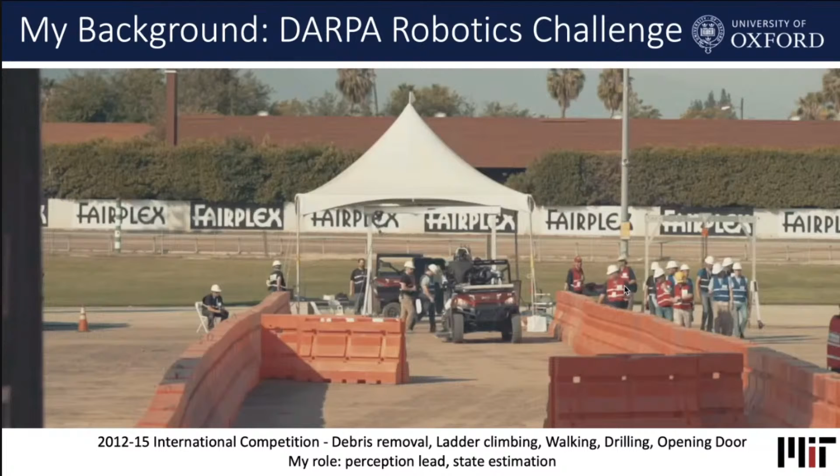Through that, I worked with Cesar Cadena, who was one of Jose's students at that time. But I took a sort of slightly left-field direction and got involved in a large-scale robotics competition called the DARPA Robotics Challenge, which you might be familiar with.

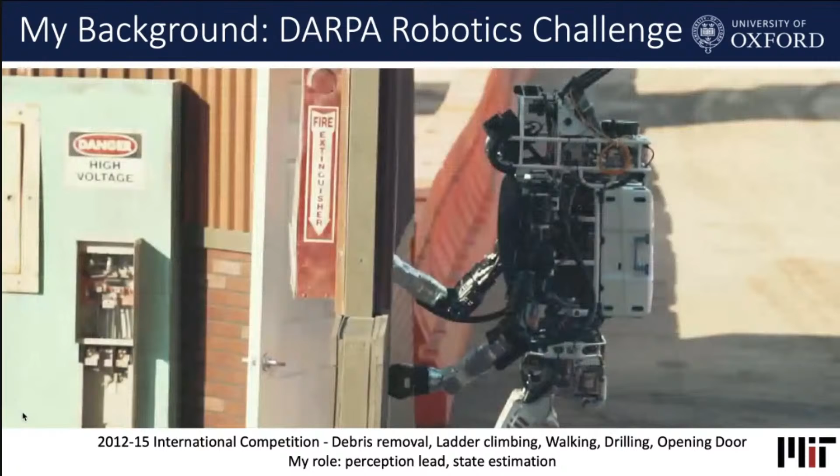It ran until about 5 years ago, and it involved a slightly clunky older version of the Atlas robot from Boston Dynamics, doing a variety of manipulation and locomotion tasks. I had the role of leading on the perception side of things, and in large part that involved focusing on state estimation and local situational awareness and mapping for the robot to do these tasks.

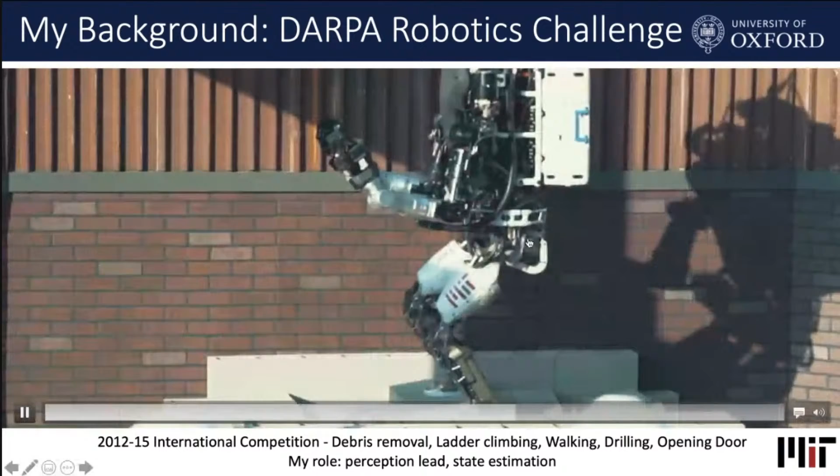Quite a number of our team have now gone on to work on the actual Atlas team at Boston Dynamics. One of the projects I was involved in at that time that I was most interested in was trying to couple perception into the locomotion system.

Here you can see a system in which we have an onboard state estimator, which I'll talk about in more detail later regarding legged robot state estimation. Effectively, we have a motion estimator that uses the robot's legs, an IMU or fiber optic gyroscope in the robot's pelvis, and combines all of those measurements together to get the position of where the robot is that you see in the field of view.

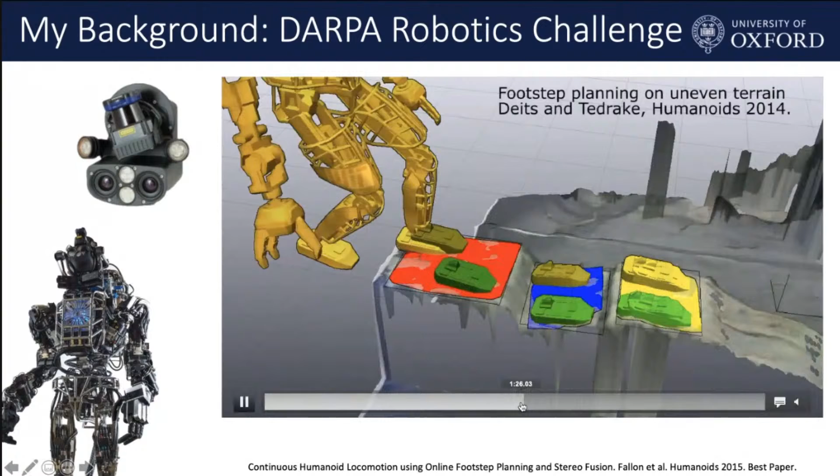On top of that, for this particular work, we were fusing together the stereo images from the robot's stereo camera, which you can see on the left-hand side. It was actually a passive stereo camera mounted in the robot's head, which was quite a significant challenge. In doing so, we were able to build reconstructions in front of the robot's feet.

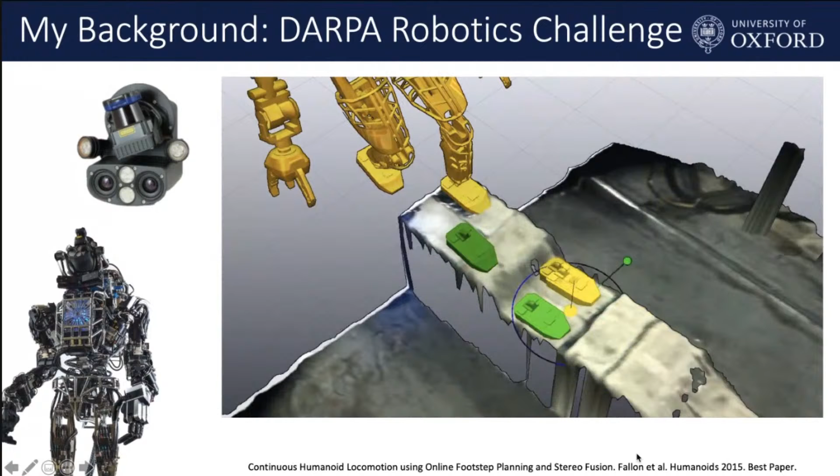This enabled receding horizon footstep planning. This was kind of one of the only major perception-in-the-loop locomotion systems developed in the competition. As you can see here, at interactive rates it was enabling the robot to replan and then execute the motion indicated in the video.

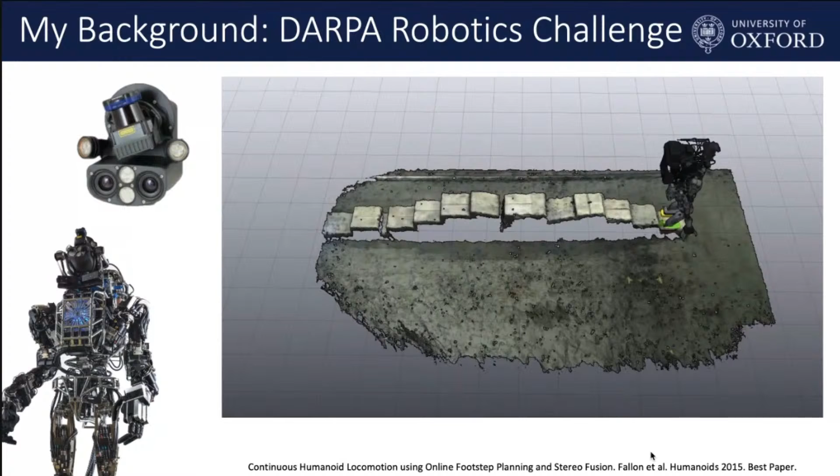So when I finished working on that as a research scientist or postdoc, I moved to Oxford to set up my own independent research group, and we focused on quadrupeds. 4 legs is better than 2, a phrase from the book Animal Farm, but effectively quadruped platforms are much more amenable to field usage and for things like exploration or inspection tasks.

You're probably very familiar with quadruped platforms like Spot and the ANYmal in the middle that we work with. We're working on research tasks to do with that, building local situational awareness using visual inertial navigation and multi-sensor fusion, and also doing work on dynamic locomotion and motion planning. I share this group with Ioannis Havoutis, illustrated here on the right-hand side in orange.

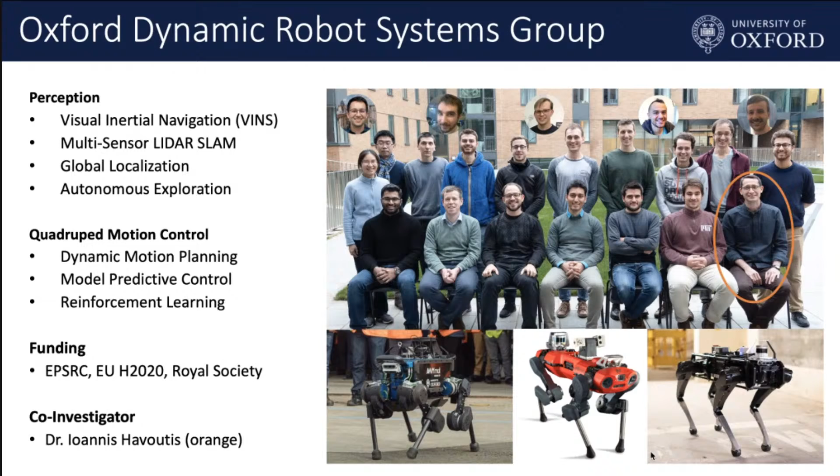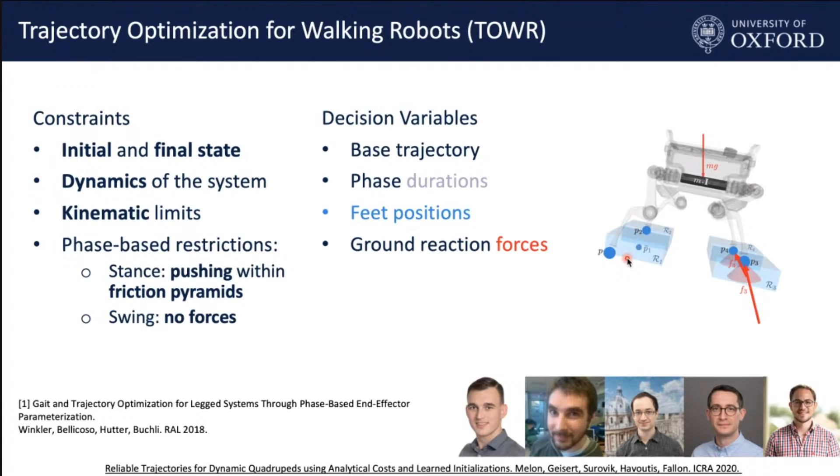Also, other constraints that restrict the motion are the dynamics of the system - the mass distribution of each of the links in the legs as well as the torso, and also the kinematic limits, the capacity of the robot's feet to move from one place to another or to hold up certain configurations. In this particular work, that's simplified to this blue box. This work on trajectory optimization formulates these constraints as an optimization problem, illustrated here on the right-hand side.

For example, for the left foot moving, it can apply a certain force profile over time - this is in the order of a second. You can see the force in the z-axis, the downward force, which is either zero over the course of this part, or then rises up above that, limited by effectively a spline constraint. Initially there's zero force because the foot is in air, then forces are high once it comes into contact, until again it goes out of contact, while the foot position conversely can move when there's no force and must stay stationary when there is force.

Effectively this formulates a constrained optimization problem, which we then solve with nonlinear optimizers. We use a package called IPOpt.

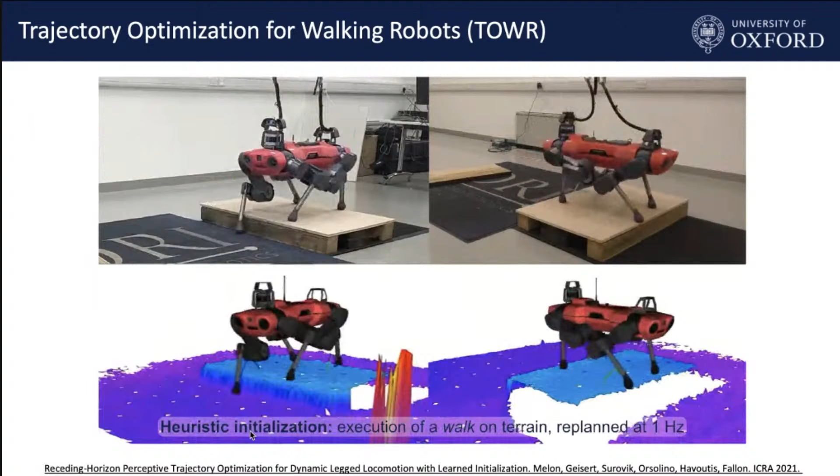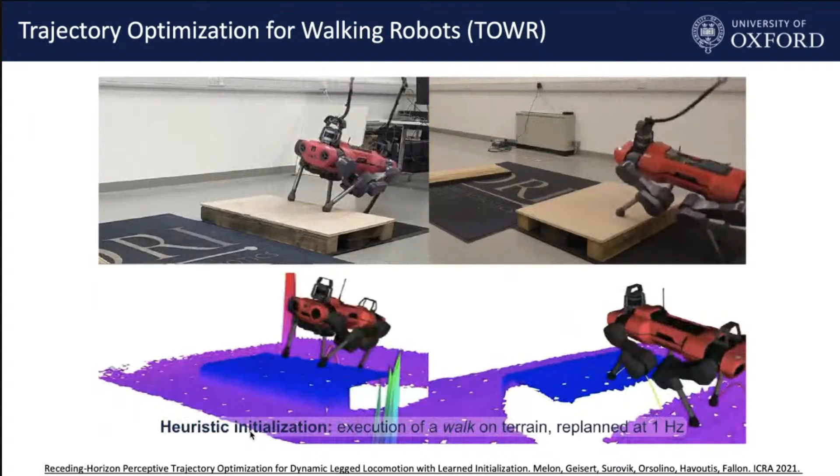So this is to show some of the work that we've done on computing dynamic trajectories given these set of constraints. It's work that we've just ported over to this newer version of the ANYmal robot. The black robot is an initial prototype by a company called ANYbotics from Zurich, and this platform here is a newer version called ANYmal C version C. They're effectively the second competitor to Boston Dynamics in the development of legged robots.

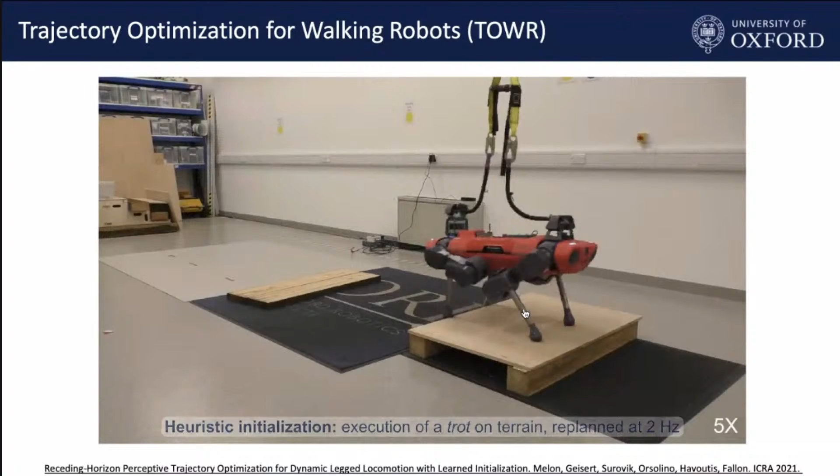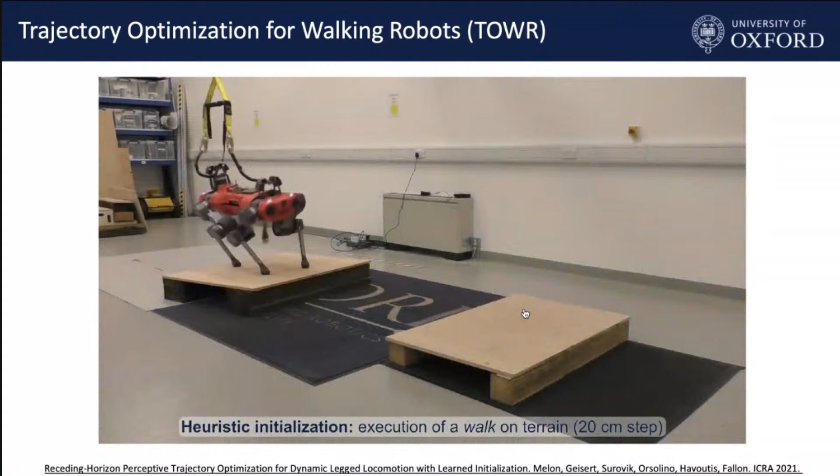The key advantage for us using this platform is that we have access to the software API to actually command the robot at 200 or 400 hertz, while with Boston Dynamics, what's available to both industrial users and the academic community is just high-level access to tell the robot to go at a certain velocity of its torso. Here we're computing these trajectories for the robot to walk over pretty significant obstacles for its height, and then executing them while replanning based off of the perception.

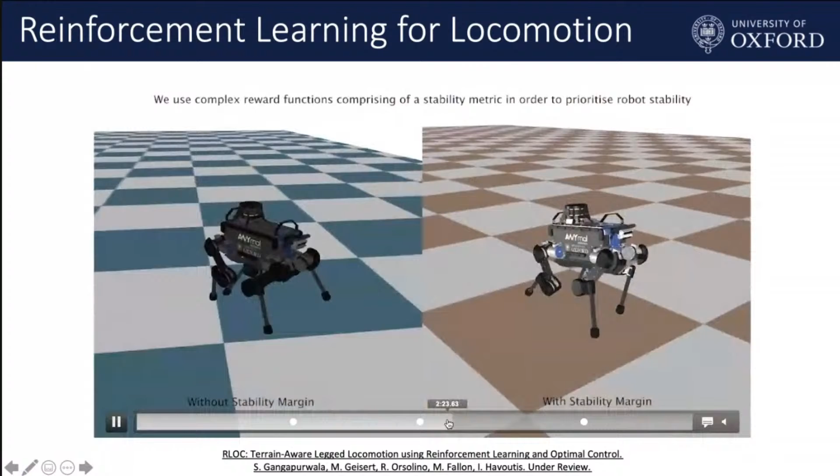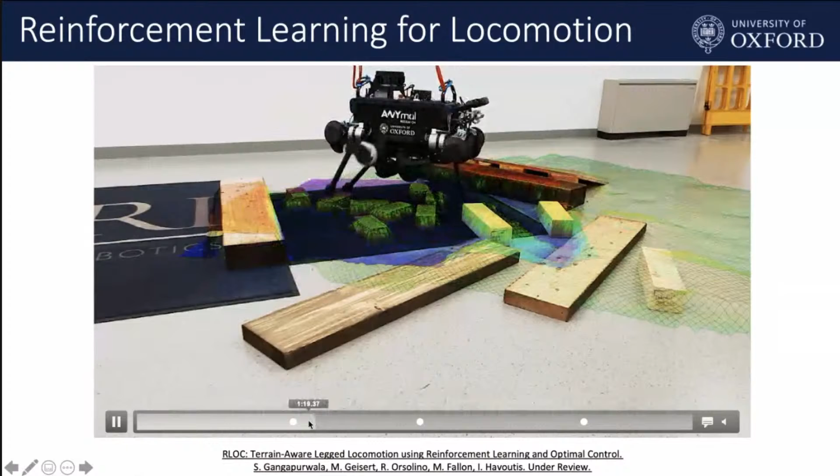This bit is just showing that if you provide suitable reward functions, then you can generate things that are more like walking gaits. After training, what you see here is that with an accurate model of the robot and of the terrain underneath it, this is a common representation we'll keep coming back to: elevation reconstruction underneath the robot, based off of depth cameras like the Intel RealSense pointing at the robot's feet. Effectively, the reinforcement learning algorithm gives us a mapping between the observed terrain and footstep parameters to optimize a locomotion walking controller that closes the loop for locomotion.

Moving on to the core of my talk, I'm going to talk about multi-sensor odometry and mapping, and I'll frame it by the DARPA Robotics Challenge, DARPA Subterranean Challenge. It's a multi-year competition in which teams of robots—you can choose as many robots as you'd like to deploy, but you've only one hour in which to deploy them—explore unknown environments.

On the right-hand side, you can see a facility in Washington State in the US, where in February of last year, just before the first COVID lockdowns, the teams gathered to explore a few of the floors underneath one of the cooling towers, and you can see the characteristic shape of the cooling towers here. The robots were given one hour to explore the facility.

It started at a gate like this, and you can see these tags that were used to infer the starting point using cameras. Thereafter the goal was to build very large-scale, accurate maps of the environment, and within that environment to locate objects of interest. So it was a giant treasure hunt.

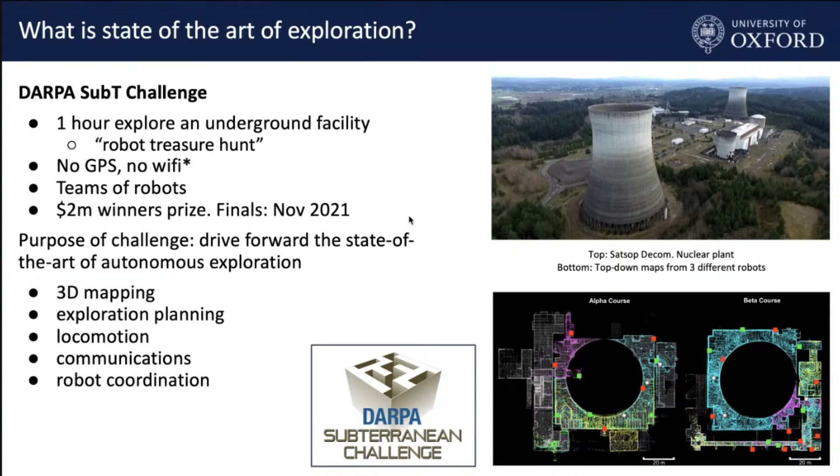The objects of interest were backpacks and mannequins that could be detected using autonomous computer vision, or actually reported back to an operator. There was actually one operator—all of the other members of the team could only communicate orally with the operator, who would then deploy each of the robots down the starting gate as illustrated in this video. Thereafter the robot either could communicate through its own onboard wireless network back to the operator, or would have to operate entirely autonomously.

The idea of the competition was to encourage the development of highly autonomous systems, but not actually requiring absolute autonomy, which is typically a very complex design requirement when operating in very unknown environments like this. Here you can actually see the robot passing one of the other robots, the drone that our team had deployed earlier in the competition, as it makes its way down the tunnel.

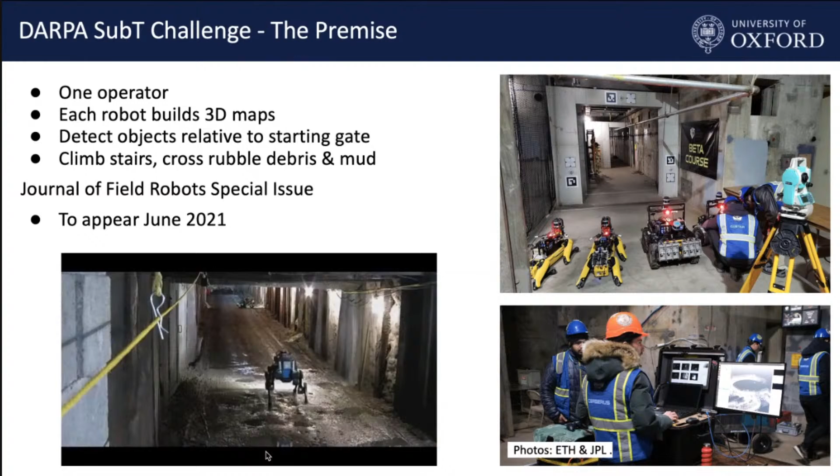A little bit further down the tunnel, you can start to see some of the challenges. You can see muddy ground with puddles of water, which are particularly challenging because if you're using a LiDAR or a depth camera to scan the ground, these show up as blank holes. And as it goes up the corridor, you can see one of the other robots that had fallen in that stage of the competition.

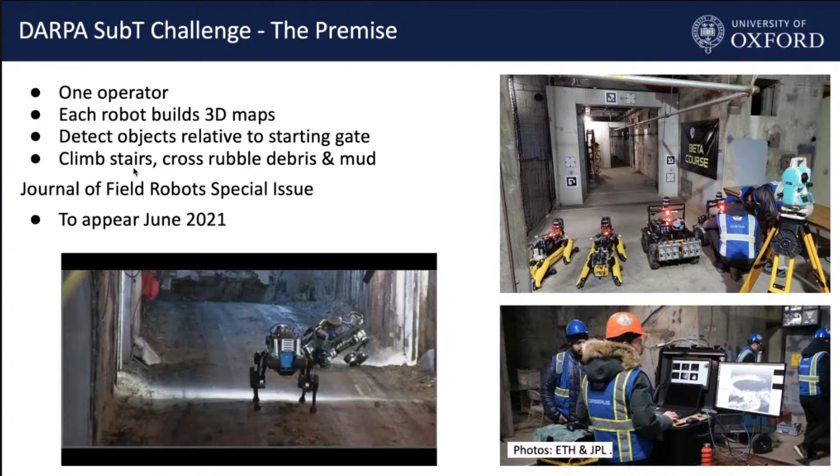You should keep an eye out for a special issue in the new rebooted Journal of Field Robotics that should appear in the summer, describing the progress of all the teams competing in this competition.

This is the team that we're involved in. I came in as a junior member after the competition had started. It's led by Professor Kostas Alexis, who just left the University of Nevada to go to a university in Trondheim in Norway. There's also a heavy contribution from ETH Zurich, who we collaborate with on the quadruped robots, as well as the ASL team from Roland Siegwart. So that's Marco Hutter and Roland Siegwart. Our focus is on aerial and legged systems.

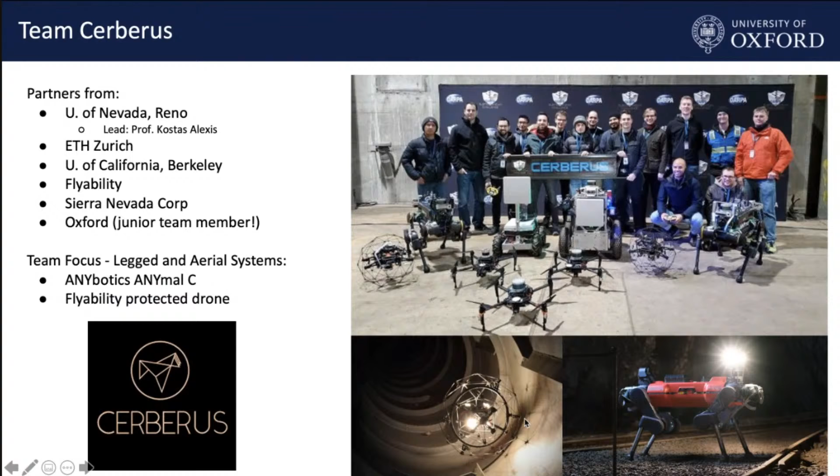I'm going to focus on the legged system. I think this competition has demonstrated the growing maturity of both autonomous mobile robots and legged systems. The last phase of the competition was actually won by a team from JPL called CoStar, deploying a couple of Spot robots that were able to autonomously climb up and down staircases during the competition. But it's not the only type of platform.

On the bottom right here, you can see a platform from the team from CMU called Explorer. But the key comparable characteristic, as I mentioned previously, is the need for omnidirectional sensing in all directions - depth cameras and LiDAR pointing in all directions, both around the robot's legs and underneath its belly, as you can see here, but also out in front to be able to perceive where free space is.

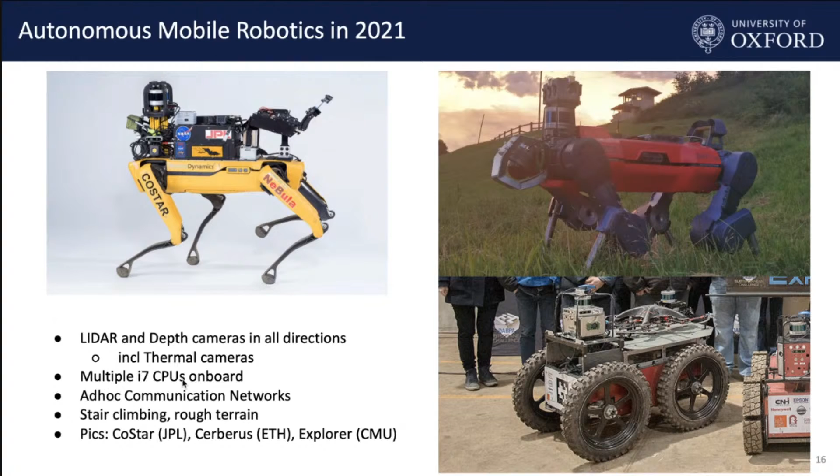That's made possible by the miniaturization of multiple i7 CPUs, and also one of the technologies I won't talk about that is a significant part of this competition is the ability to deploy communications within the facility. If you take one of these mobile robots exploring an unknown facility, the first time it turns around a wall made of concrete, your communications network would fail. So a significant engineering challenge has been to develop deployable wireless networks that, as you can see here, are dropped from the robot's belly, and that can then be used to create a kind of mesh network that allows the operator to communicate deep into the facility.

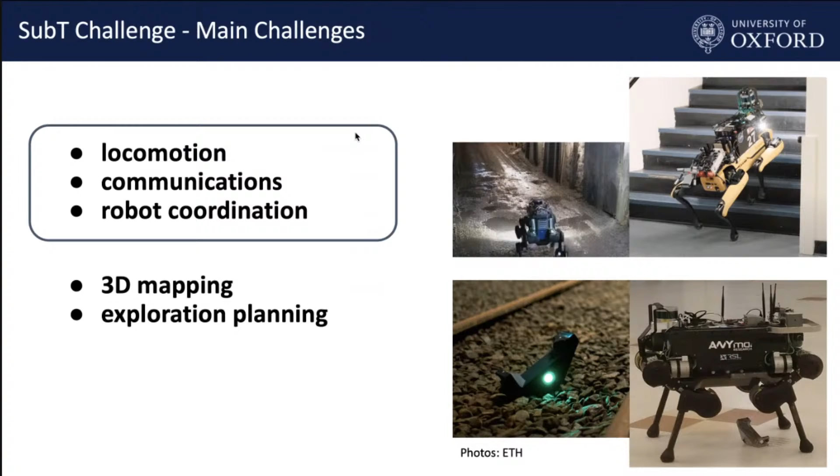Another aspect is mobility, and as I mentioned, I won't focus so much upon that, but the Spot robots are pretty impressive in this regard. What I will focus on for the rest of the talk is the 3D mapping systems that we've been developing.

Given the multitude of different environments we're expected to operate in, including the addition of artificial smoke, which can have a really negative effect on LiDAR, these are four different types of odometry that we'd like to take advantage of in our platform. So you can see forward-facing cameras, the LiDAR, the legged contribution, and thermal odometry, which I won't talk about very much today.

I'll start with leg odometry, with a background in the DARPA humanoid challenge that I mentioned previously. I started working on quadruped systems, and what you can see here is a quadruped from a group in the Italian Institute of Technology in Genoa, which develops this quadruped robot called HyQ. One of the challenges you can see from it locomoting is that when its feet press against the ground, it causes quite an impact, which can have a significant effect on leg odometry.

Leg odometry is a process by which, when a robot makes a firm foothold in the ground, we can use the knowledge that a particular foot is being classified as being in contact to create a constraint and infer the forward velocity. Effectively, you have a lever arm where you assume a particular foot is in contact with the ground, and as the rest of the robot moves forward, you can infer its relative motion from each one of those contact points. However, there's quite a significant filtering challenge in doing so.

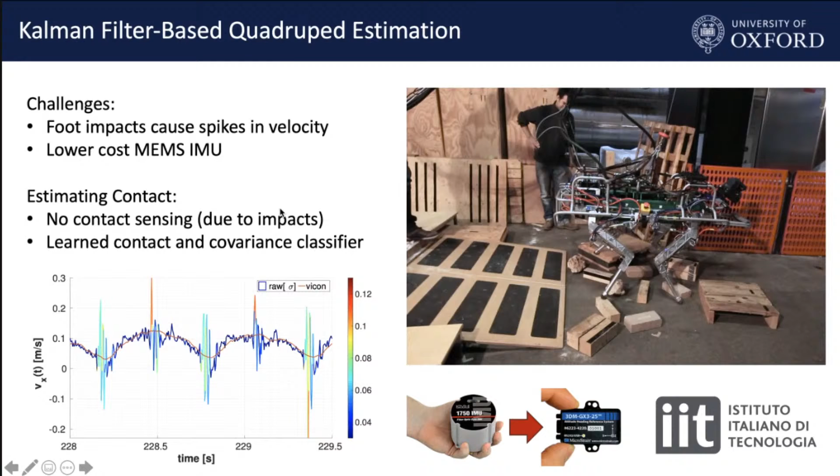So you can see these very spurious velocity spikes, which makes incorporation of this within a control system quite challenging.

But over the course of that project, we developed an extended Kalman filter based quadruped state estimator. So an extended Kalman filter is incrementally carrying out IMU based propagation.

So either with this fiber optic gyro from a company called KVH on the bottom left. That's effectively measuring the movement of light around a sphere inside of the fiber optic gyro, and being able to use that to infer very accurately rotation.

Or more commonly these days, we focus on MEMS grade or lower cost electronic based IMU sensors. Within an EKF approach, we're predicting the state and then correcting it with the leg kinematics.

Onto that work, we incorporated both vision and LiDAR. But what we wanted to do in the work that we've done in the last 3 to 4 years is to instead look at fusing the leg kinematics, which is reliable. It gives you a low drift rate, and it's very, very low latency, because effectively at 400 hertz you get each update of your IMU sensor and your robot's leg kinematics, and to incorporate that with vision going forward.

So visual inertial odometry, as you would have heard from talks from Davide Scaramuzza and Stefan Leutenegger during this series, is an increasingly mature field in which measurements from an IMU and either a mono or a stereoscopic camera are fused together to constrain the motion, usually on a drone platform.

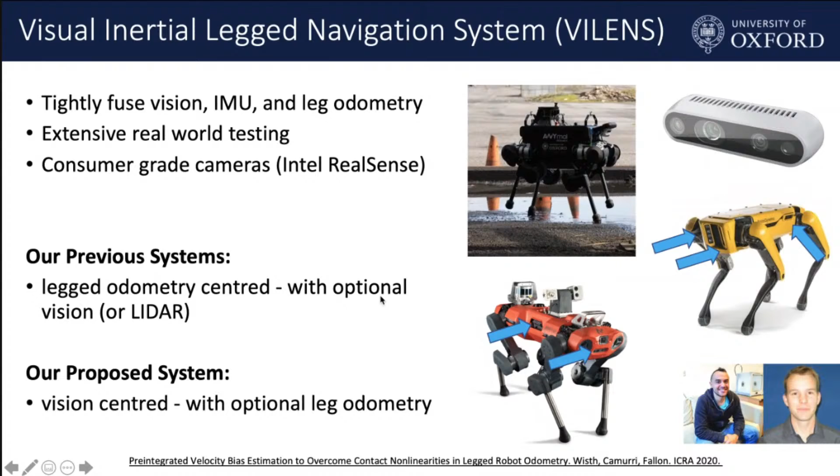And as I mentioned, one of the key motivations is that on these robots going forward, we're likely to see multiple depth cameras, such as the RealSense, which also has an IMU. This is the Intel RealSense D435i, and it has an IMU inside. So it's a fully usable sensor for visual inertial navigation.

And I'm going to frame visual inertial legged navigation within the same framework as the general problem of visual inertial navigation for drones. So we're interested in estimating the state vector of the robot, its orientation and its position, its linear velocities and biases.

Where the biases are effectively due to poor performance of the underlying sensors that are providing us with IMU measurements. So they are subject to characteristic drift sometimes. So you have your gyroscope and accelerometer, but in addition, for the quadruped system, for the work that we've done so far, we have this continuous stream of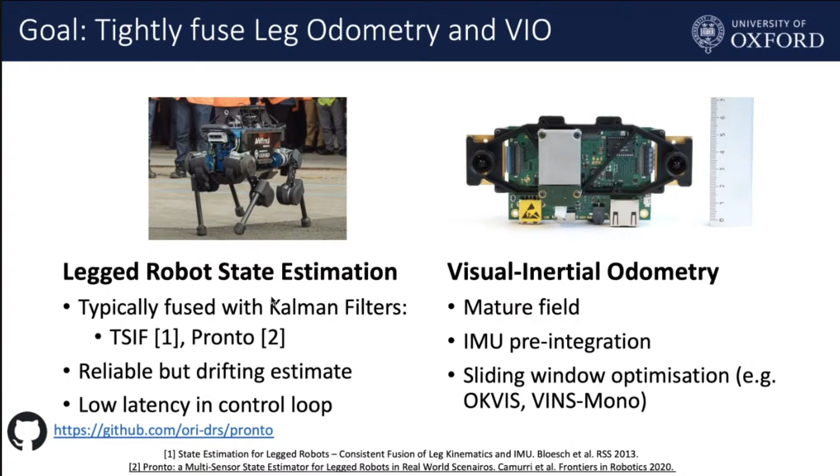motion estimate from the leg kinematics, but we don't actually have a very good characteristic for the materials that the robot is stepping in. If it's concrete, if it's mud, for example, it's soft. But we're required, or we're reliant on understanding the nature of contact to be able to precisely estimate the motion using leg kinematics.

So in the work that incorporates vision, what we'd like to do is to take effectively the remaining error and noise that comes from the leg kinematics and use that to estimate a kind of separate bias state. So these are biases that give us an observation of the non-Gaussianity of the leg kinematics. So if, for example, the robot's slipping or sinking into ground like gravel, then we can actually passively infer that bias within our estimator.

If you're familiar with this representation, this is called a factor graph. It effectively formulates all of the constraints of the robot's odometry and illustrates the relationship between them.

So if you look only at the upper half of this figure, you can see a series of IMU constraints between consecutive states of the robot. The x0 being the states of the robot.

You can see on the very top in green, these are visual constraints to features that have been observed in the environment. So points and corners in the images, while at the bottom is these velocity bias constraints that I mentioned. So the red elements on the bottom are contributions from the robot's leg kinematics. Otherwise, without the red elements, the approach falls back to a more typical visual inertial navigation formulation.

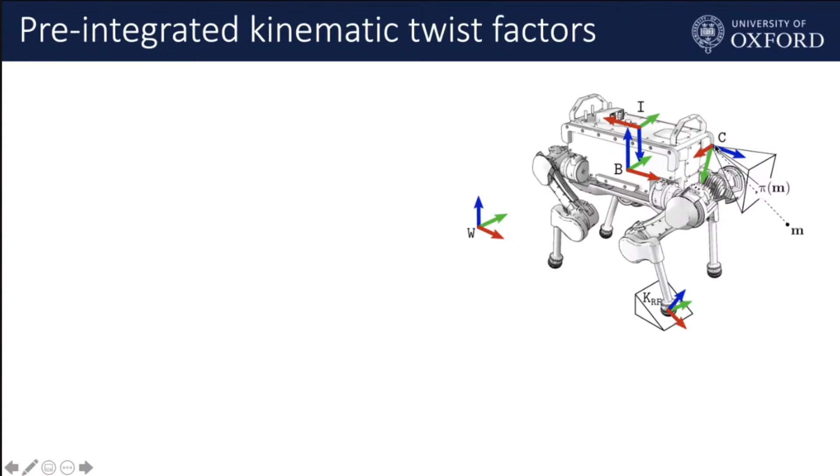A note on how we incorporate the kinematics: when a foot is in contact with the ground, we can use the inferred contact of the foot to give us a measurement of the velocity of the robot's base link. All of our estimation is typically done either in the camera frame or in the base link of the robot, since they're rigidly attached to each other.

I won't go into great detail since it's quite specific, but effectively we're able to estimate this evolving bias term on the velocity of the base due to the non-Gaussianity of the kinematics. This bias is approximately constant for a particular gait or terrain type, allowing us to retain the underlying assumption of Gaussianity for all measurements going into our least squares optimization problem.

Otherwise, the front end of our system follows a typical approach for state-of-the-art visual inertial navigation systems. Because the robot operates close to the ground, we can use stereo factors. These blue features being tracked are triangulated from a stereoscopic camera pointing slightly toward the ground, with a KLT feature tracker to retain them over time, providing visual feature constraints for the factor graph.

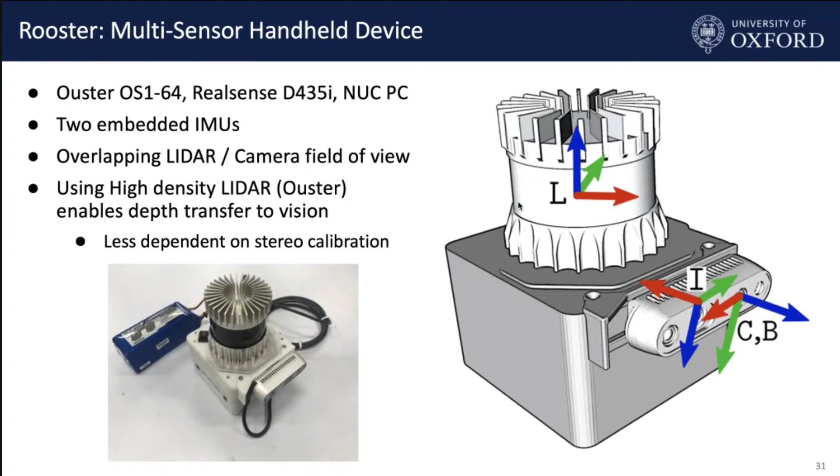It's probably not as accurate as Velodyne, but we've been interested in using it because it allows us to do things like transforming LiDAR points into camera images, which allows us to be less dependent on stereo calibration, and also gives us the capacity to fuse different constraints from these different modalities.

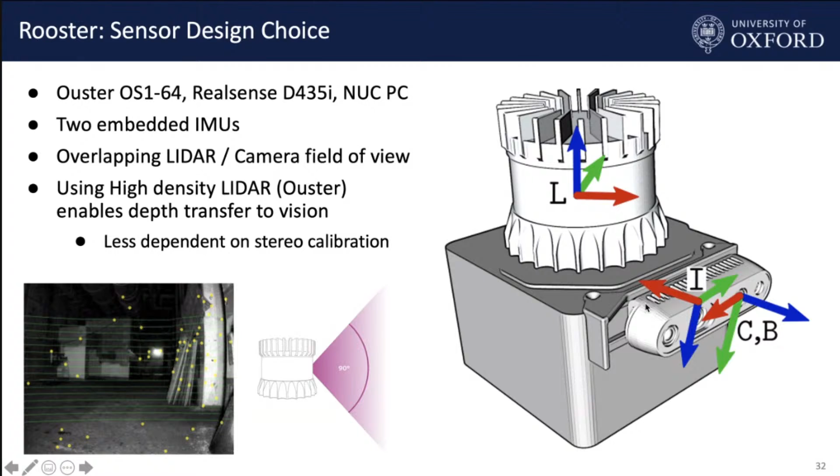One of the key advantages of both of these sensors is that they can be synchronized to a PC inside the box passively without hardware synchronization. So we wanted to make this payload and the fusion of both LiDAR, IMU, and vision constraints within a single modular payload, a sort of focus of our work in the last year.

And we just happened to have this platform put together in February or January last year, and it gave us an opportunity to do a lot of work that was easier to do without a robot platform during the lockdowns that we've had here in the UK.

So we adapted the work that we were doing with the vision and legged system to incorporate low-level constraints from the LiDAR. There's a very common LiDAR odometry package called LOAM, which is probably the best performing laser odometry system.

What we wanted to contribute that might go beyond the state of the art was to incorporate primitives that could be tracked over a long period of time. So while LOAM is effectively the state of the art of laser odometry, there are a few degenerate modes where the algorithm fails, in particular long corridors.

And we wanted to be able to jointly fuse together all of these estimators so as to be able to get kind of the best of both worlds.

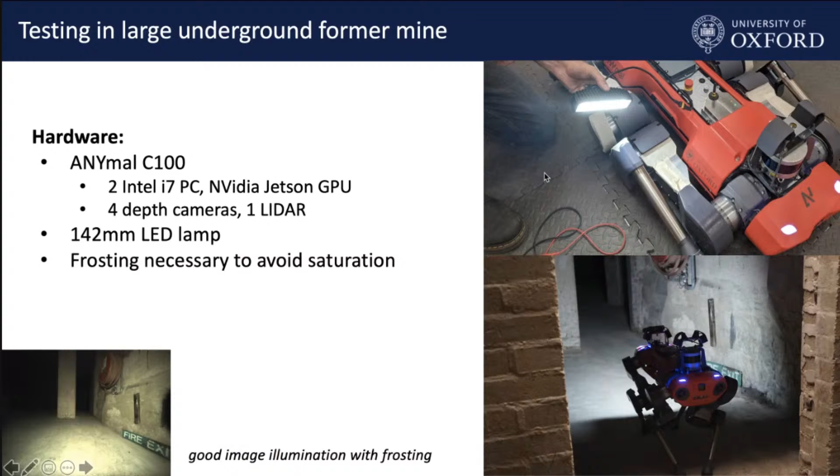But it's large scale, approximately the size of 100 football fields, the space that we use for exploring. As you can see, the facility is entirely unlit, so our ANYmal is fit out with artificial lighting, and you can see here iterative phases of the robot planning and exploring.

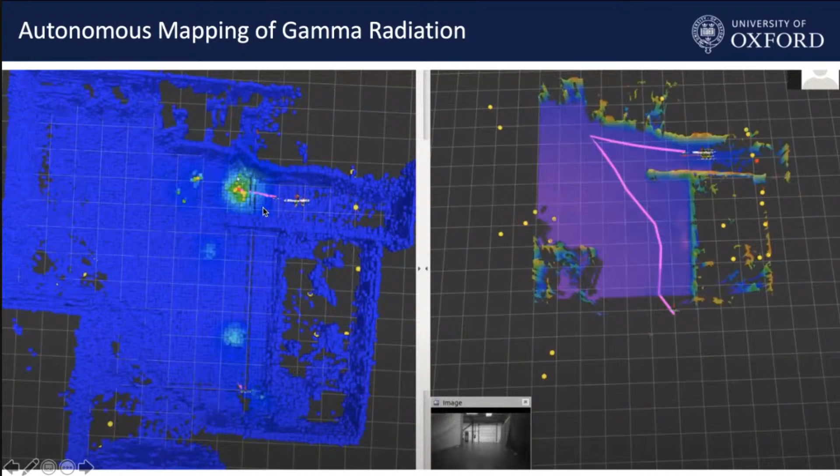And so yeah, we do work on radiation mapping on top of this - I don't really have time to go into it. This is an illustration of a radiation map that could be built, for example, by a robot exploring or being used in first response. I have some upcoming work on multi-camera odometry, using learning within legged kinematics, and also expanding the work to multiple floors.

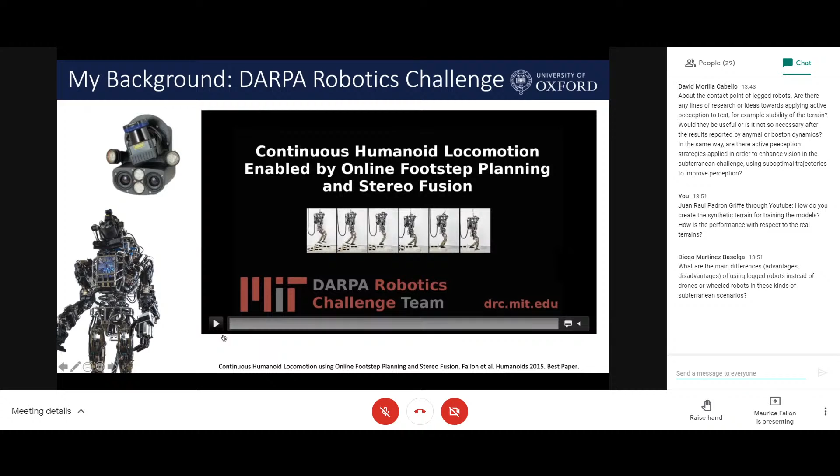Walking upwards is actually vastly easier. When you're walking up a staircase of steps, as you might see clipped at the start of this video, you see all of the frontal facings of the steps, so you can see sharp edges as the robot perceives them. This is the full map after the full reconstruction.

If you think of the field of view of what the robot's seeing, maybe it's shown in part of the video here. I don't know if it actually appears on screen, but effectively you've got a nice perpendicular view of all of the step edges.

While when you're walking downwards, you don't see clearly the steps until you're right over the top of them. So the place where the robot would like to step is as close to the near side of the step as possible, but that's effectively hidden until the robot is over the top.

So what you see here on the right hand side is the reconstruction, and compared to the reconstruction earlier in this video, the latter part is actually very blurred. This was by far the hardest part of this experiment, walking downwards. There's a need for a little bit of learning work on the perception side to regularize the reconstruction, so as to sharpen it in a downward direction. It's vastly harder for a robot to perceive going downstairs for this reason.

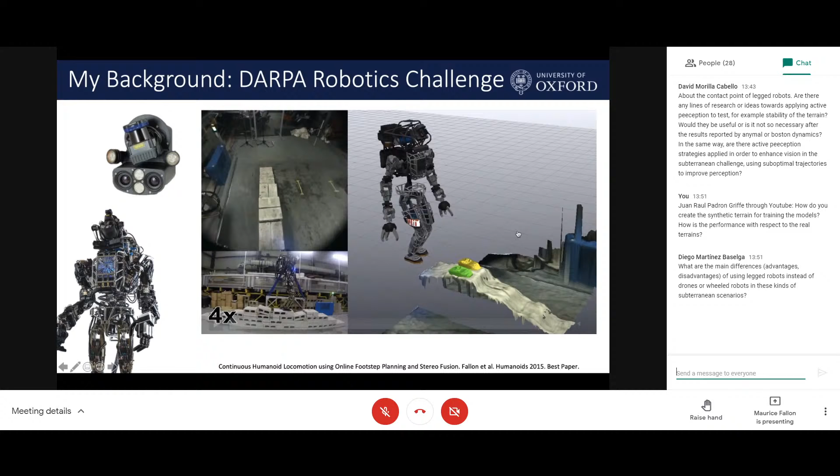But on the reinforcement learning part, there's no particular adaptation. We haven't particularly got to the stage of adapting it specifically for downward facing directions here.

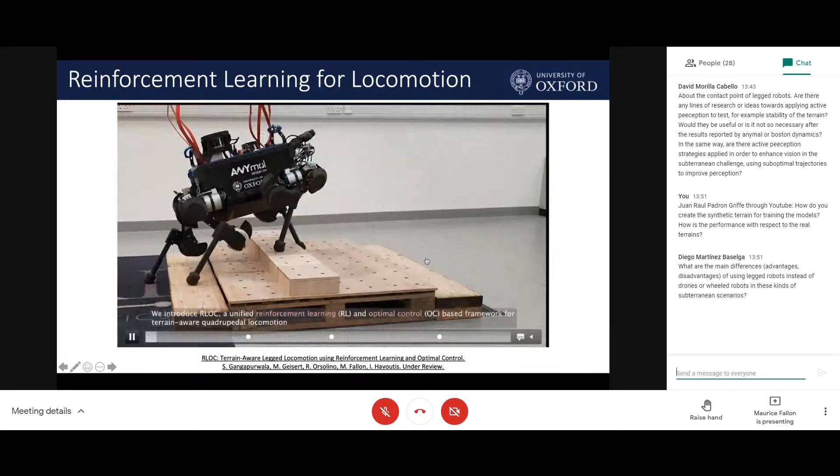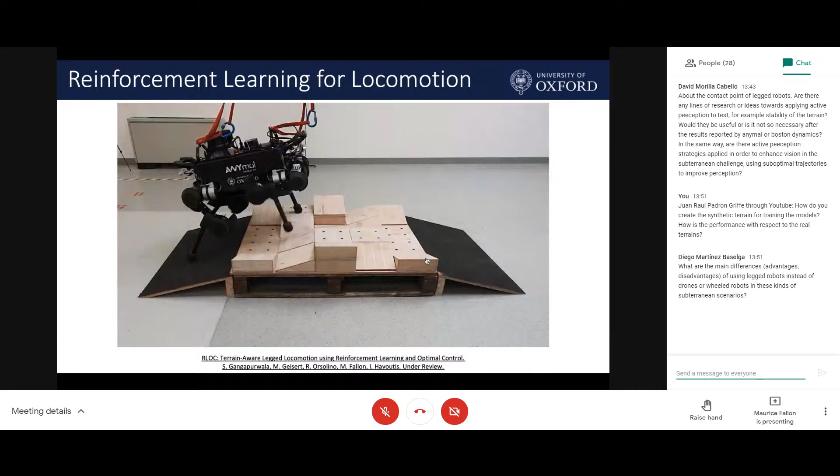Here you can see that we're sufficiently far enough away that the robot is able to perceive each of the steps are sufficiently wide enough that we're still able to perceive the boundaries between steps. By and large, the reactivity of the robot is what's needed to pick up the slack.

I'd say there are some important design decisions that Boston Dynamics have made to have their system be more reliable in this scenario. They have a much wider field of view depth camera than we have, for example. So there's a relationship between the sensing and the reconstruction, as well as the motion planning that's necessary.

I guess another difference might be that the robot is trying to pay attention to the stairs specifically to decide how to move, while humans tend to be thinking about different things, maybe inferring the size of the steps and then assuming it's going to be like that all the way up or down. Yeah, that would probably be a difference also.

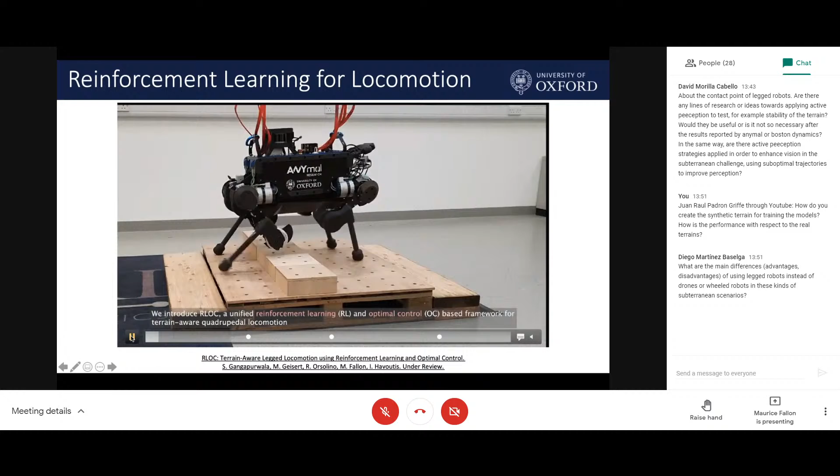Effectively, when walking down, we're often not looking at each step. So we have in our minds a regularized model, like with the work you saw here, this is more of a standard, closer to a standardized staircase, let's say.

If we wanted to achieve the best reliability, we would firmly or specifically detect the edges, so as to ensure footsteps don't come as close as this. If you want to go from 90% reliability to the 99.9% reliability that Boston Dynamics are able to achieve, you wouldn't have a robot climb up or down a staircase with it assuming the footsteps or staircase steps are regular and evenly spaced.

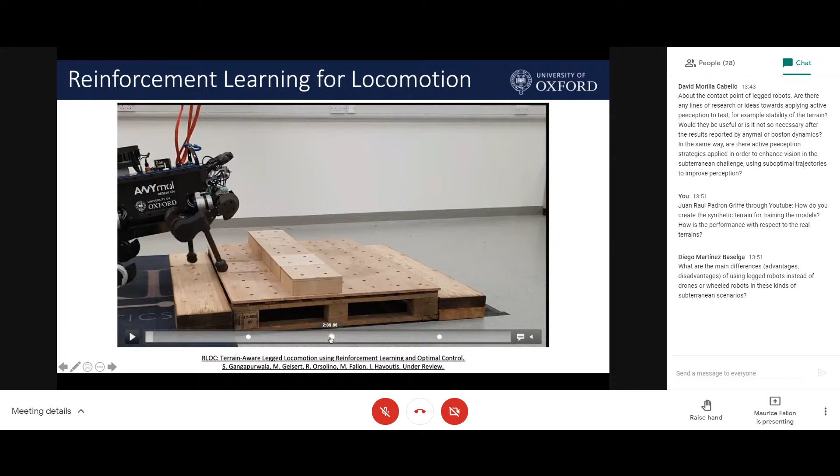Okay, so there's a question from YouTube: how do you create the synthetic terrain for training the models, and what is the performance with respect to real terrains? It's a related question.

The simulator package we're using is called RaiSim. It was developed by a PhD student and graduate from Marco Hutter's group in RSL, and it's available in an academic license, open source. These are effectively procedurally generated terrains that are graded according to the degree of complexity, so there's a periodic increase in the complexity of the learning as the locomotion improves. I think that effectively answers that question.

And given sufficient variety in the simulated training environments, adaptation to the real platform has been successful.

I mean, we do also test in with a full kind of software in the loop validation.

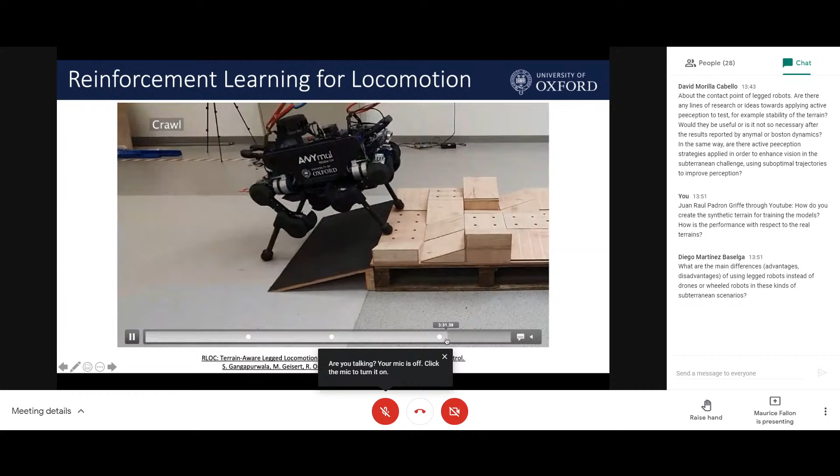One of the things I should mention is that this particular reinforcement learning controller is adapting an underlying whole body controller. So this is not doing full model-free reinforcement learning. Sid, the primary student who led this work, is doing full end-to-end reinforcement learning in other strands of his work, but this particular work actually adapts a more traditional whole body controller.

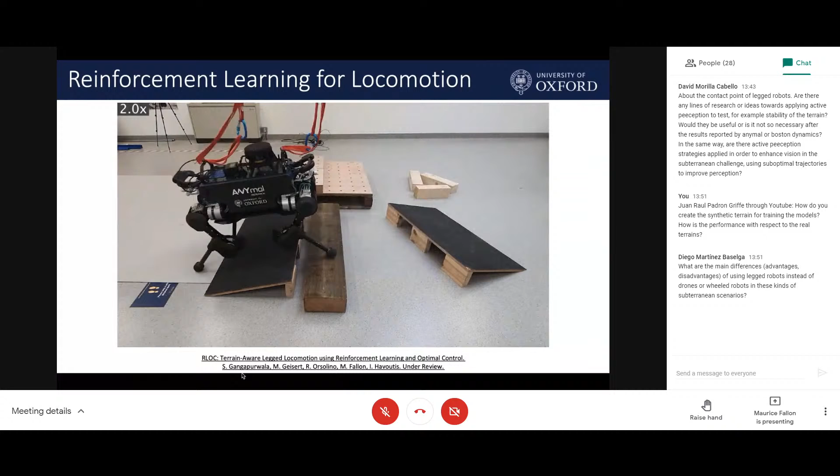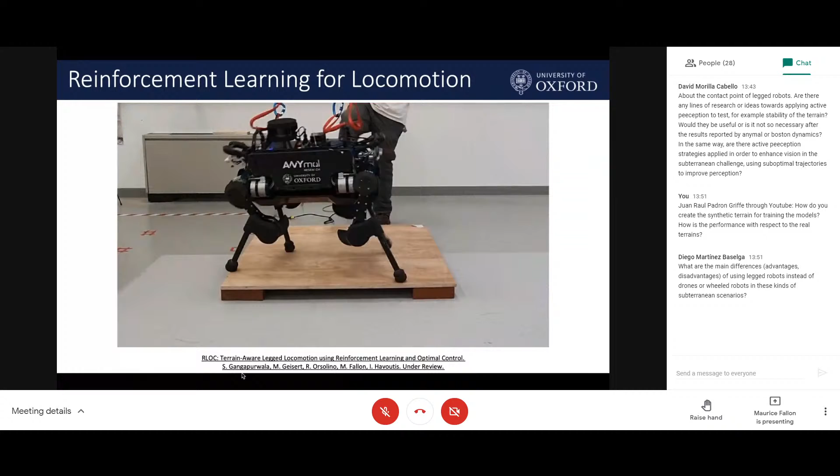So it's doing the kind of optimization-based motion planning I was talking about before, and it's effectively trained to detect or choose the footsteps as well as the body posture, with a more traditional engineered system beneath that, balancing force and maintaining a periodic trotting gait. So this is a sort of mixture between reinforcement learning and more traditional optimal control.

There's another question, there's more questions. So you have to tell us when you are out of time.

One more question from Diego: what are the main differences, advantages, and disadvantages of using legged robots instead of drones or wheeled robots in such environments?

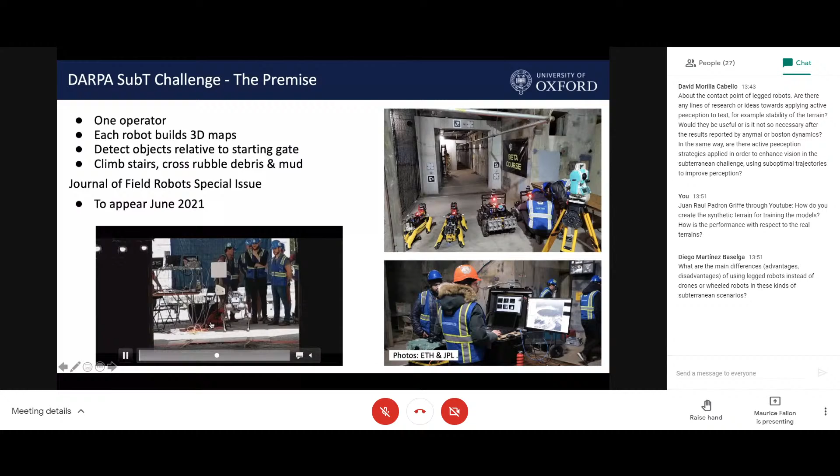Well, I don't know if I have the scenario here. Most of the teams in this competition have been using a combination of platforms. We've been working with a company called Flyability, the team as a whole, not me personally, and their drone is enclosed in a ball.

It's specifically been developed for hard to reach environments, where when it makes contact with, for example, a chimney, it would neither damage the chimney nor damage itself, so it can stay flying. Other teams in the competition are using similarly protected drones, but flying in tunnels is very difficult when you've got a very small payload and a 10 or 15 minute battery life.

So many of the teams, especially in the final phase of this competition, will be deploying drones directly from either their wheeled robots or quadrupeds to go up into hard to reach spaces. They don't necessarily have the endurance, and it's very difficult to get sufficient certainty to fly at open space velocity. Outdoors, drones can fly at 10 meters per second, but in a confined environment they're limited by their capacity to perceive and plan.

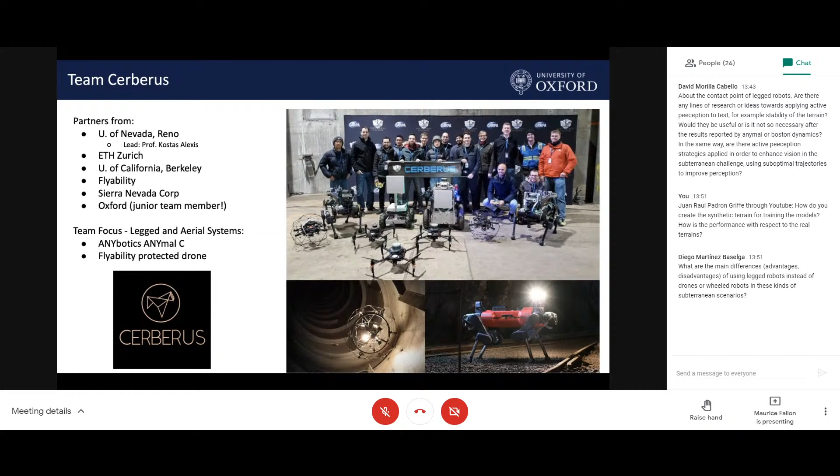So that's on the aerial side. I think they're primarily used in hard to reach spaces or areas where legged or ground platforms can't access. I'll just mention that the Spot robot used by JPL was the only team able to map 2 floors of the facility.

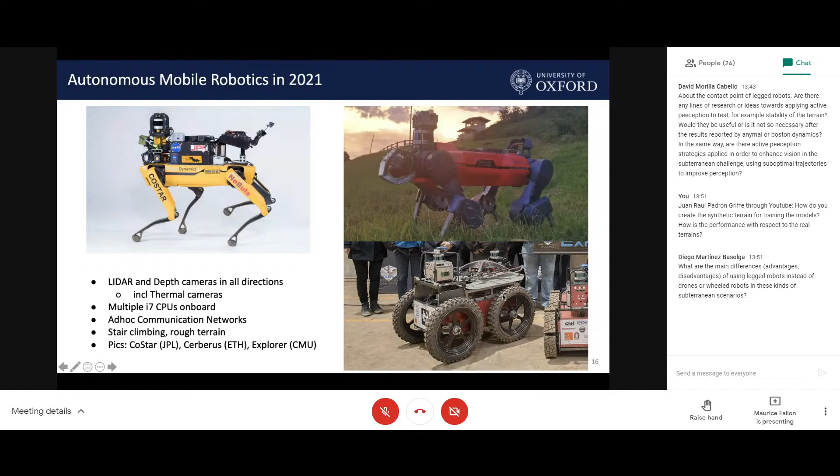There were actually 4 floors split into an A course and a B course, and in different runs the Boston Dynamics Spot robot was able to explore 2 different floors of one of the facilities, going up a full industrial staircase. Its on-ground mobility is as good as a wheeled platform, but when you have obstacles on the ground, whether ramps that DARPA included in the competition, or straight up staircases, legged systems can go over these kinds of obstacles - that's their general premise. It's interesting to see legged systems coming out near the top of the competition.

Very good, any more questions? I think Maurice told us before that he couldn't stay much longer. I don't know, Maurice, you tell us if you can stay, but maybe Maurice cannot stay longer. Yeah.